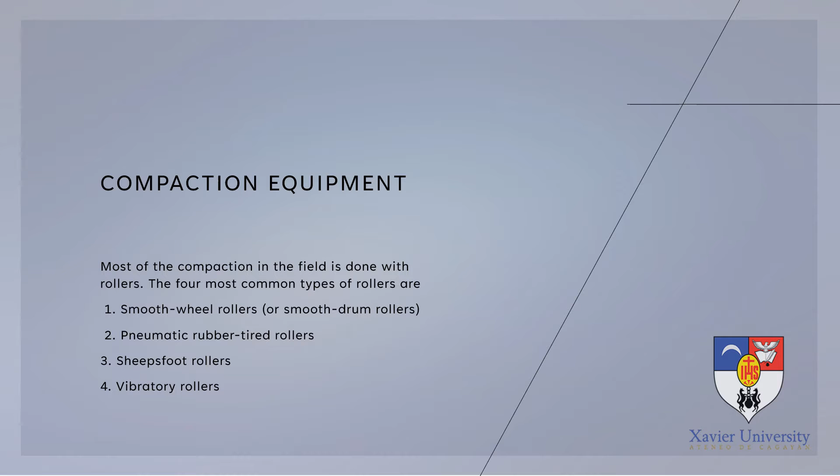The four common types of rollers are the smooth wheel rollers, the pneumatic rubber-tired rollers, the sheep's foot rollers, and vibratory rollers. We will be discussing each of these in the succeeding parts.

All right, so first we'll have smooth wheel rollers. This is how a smooth wheel roller looks like. We can commonly see this in construction sites, just like the construction site for a road widening project or road concreting project. Smooth wheel rollers are suitable for proof rolling subgrades and for finishing operation of fills with sandy and clayey soil. These rollers provide 100% coverage under the wheels.

With ground contact pressure as high as 310 to 380 kilonewton per square meter, they are not suitable for producing high unit weights of compaction when used on thicker layers.

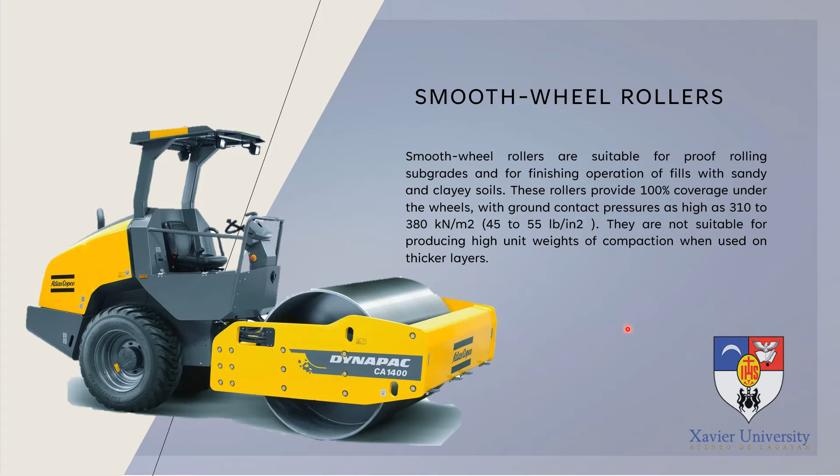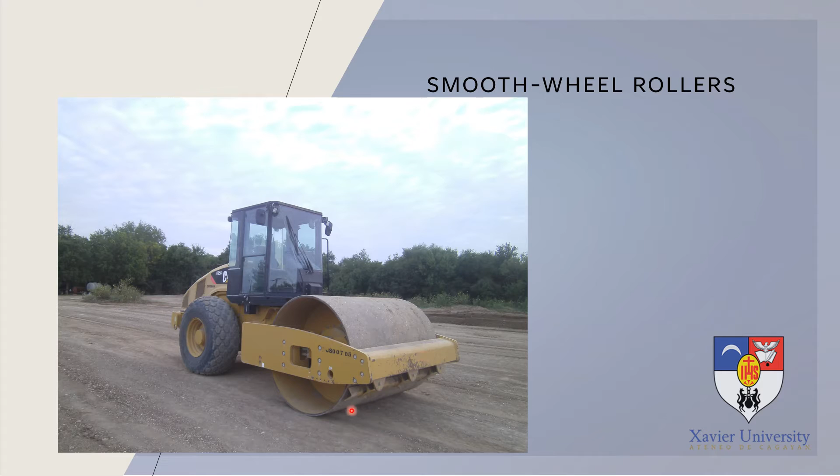That's why, for example, our embankment or subgrades are designed to be of a certain depth, for example not more than 200 millimeters. Since if you are going to use this type of roller for compaction, you would have to lay your soil in thinner layers. For example, in the DPWH specifications, you would have to lay your embankment or layer in 150 to 200 millimeters thick only, so that you would be able to compact your soil properly.

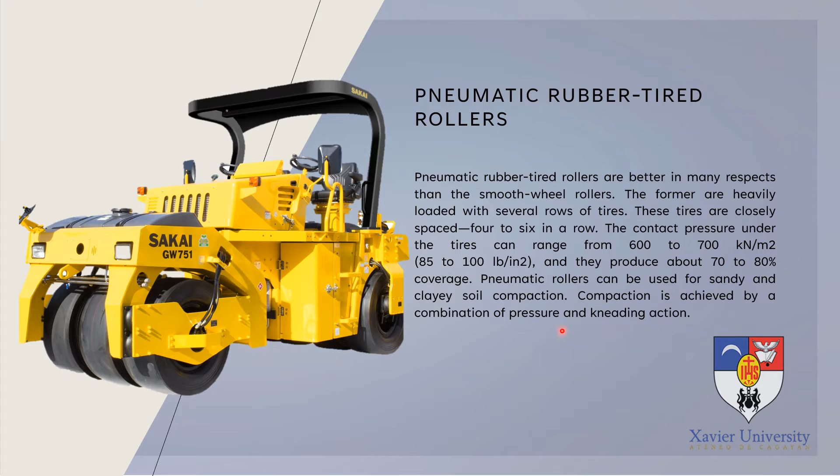But it's stronger, and the parts that are not covered are also passed over again. Compaction is achieved by a combination of pressure and kneading action. This is the mechanism of how this type of roller actually compacts our soil, through pressure and kneading action.

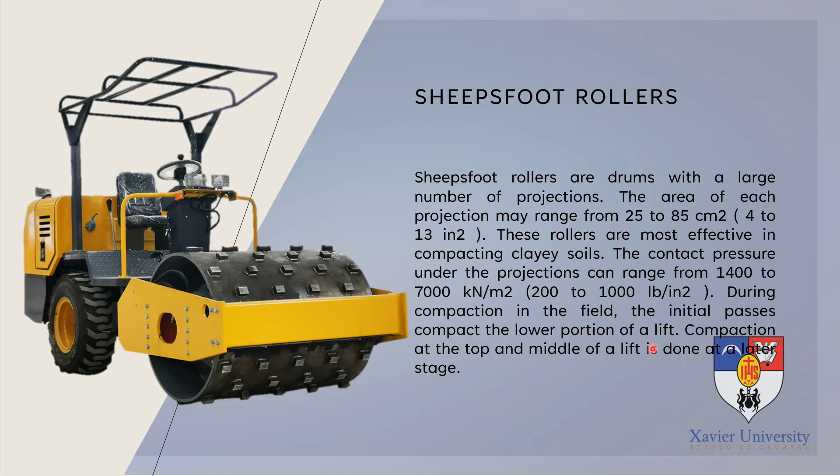The third one is the sheep's foot roller. Sheep's foot rollers are drums with a large number of projections. The area of each projection, referring to its small protrusions, may range from 25 to 85 centimeters squared. These rollers are most effective in compacting clayey soil.

The contact pressure under the projections can range from 1,400 to 7,000 kilonewton per square meter.

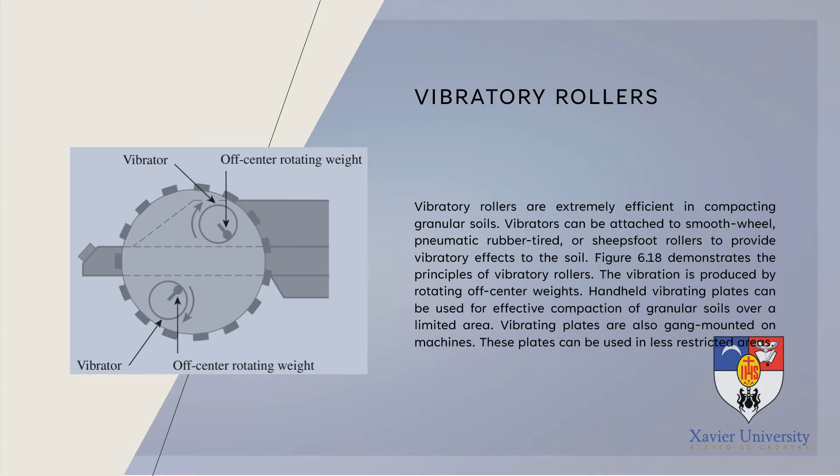We also have the vibratory rollers now. Vibratory rollers are extremely efficient in compacting.

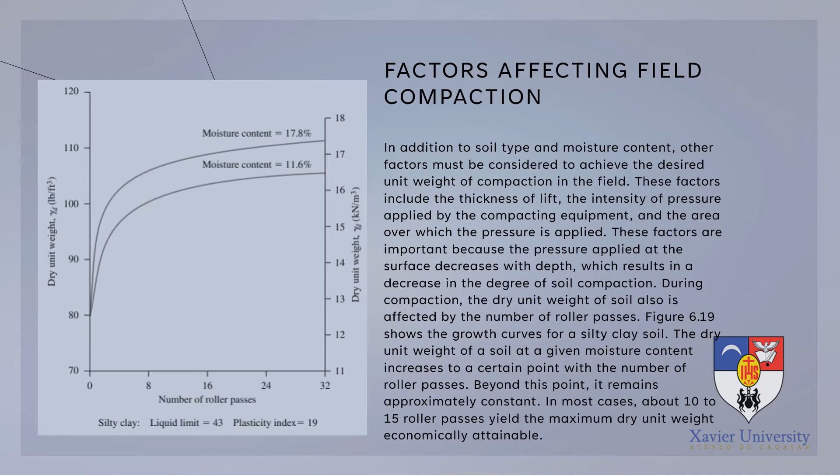So now, let us talk about the factors affecting our field compaction.

As previously discussed in soil compaction in the laboratory, such as the effect of soil type, we also have factors affecting our field compaction. In addition to soil type and moisture content, other factors must be considered to achieve the desired unit weight of compaction in the field.

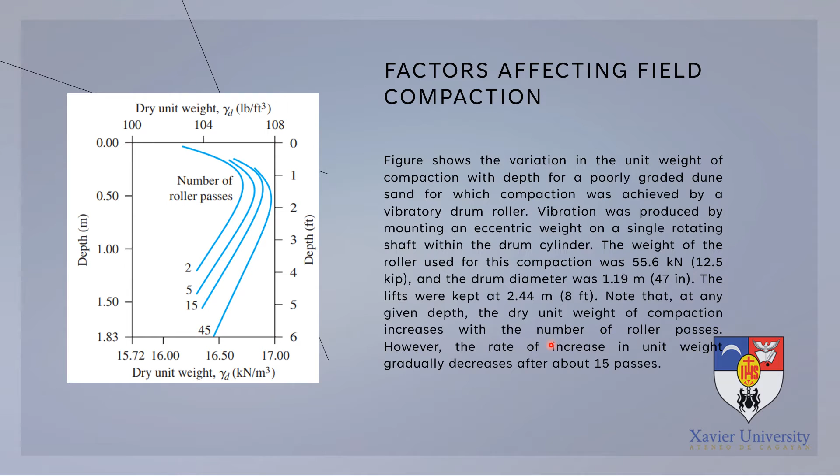These factors include the thickness of lift, the intensity of pressure applied by the compacting equipment, and the area over which pressure is applied. These factors are important because the pressure applied at the surface decreases with depth, which results in a decrease in the degree of soil compaction.

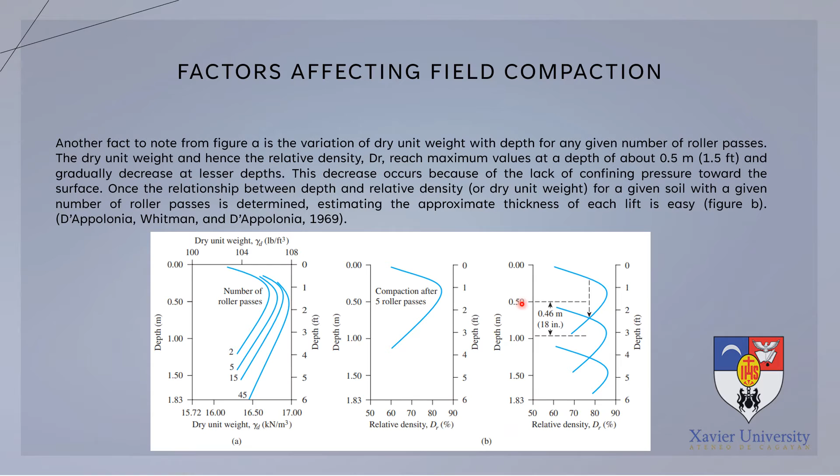So the dry unit weight increases to a certain point with the number of roller passes. Beyond this point, it remains approximately constant. In most cases, about 10 to 15 roller passes, it stops increasing and becomes more constant, yielding the maximum dry unit weight economically attainable.

What this graph means is that the more roller passes on the soil to be compacted, the more it increases its dry unit weight. That's why in soil compaction in the field, our goal is to increase the unit weight of our soil, wherein we provide a denser state for our soil.

The figure here also shows the variation in the unit weight of compaction with depth for a poorly graded dune sand, where each compaction was achieved by a vibratory drum roller. Vibration was produced by mounting an eccentric weight on a single rotating shaft within the drum cylinder. The weight of the roller used for this compaction was 55.6 kilonewtons, and the drum diameter was 1.19 meters. The lifts were kept at 2.44 meters.

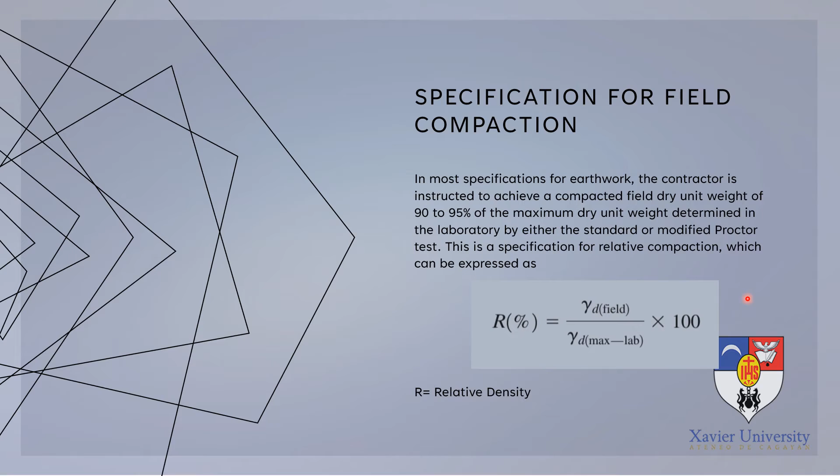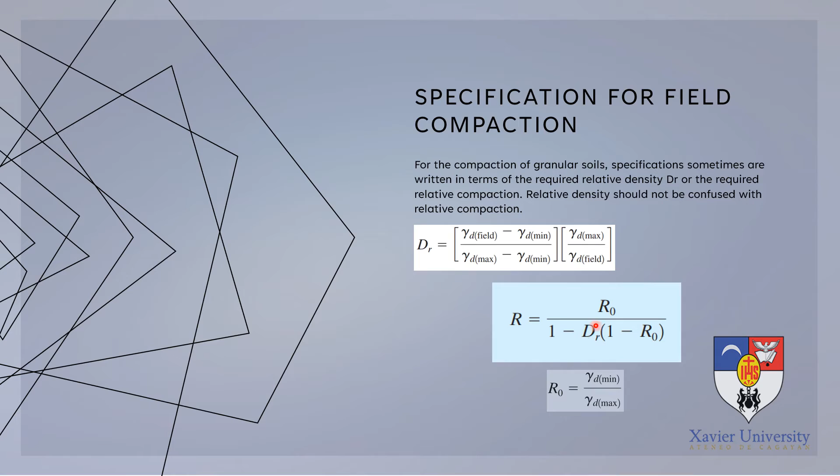Note that at any given depth, shown here in meters and feet, the dry unit weight of our soil increases with the number of roller passes. At just two roller passes, the dry unit weight is low. At five passes it increases, and our calibration of dry unit weight grows larger, continuing to increase from 15 passes onward. So as the number of roller passes increases, the dry unit weight also increases.

Another fact to note from Figure A is the variation of dry unit weight with depth for any given number of roller passes. The dry unit weight, and hence the relative density DR, reaches maximum values at a depth of about 0.5 meters and gradually decreases at lesser depths. This decrease occurs because of the lack of confining pressure towards the surface. Once the relationship between depth and relative density for a given soil with a given number of roller passes is determined, estimating the approximate thickness of each lift is easy.

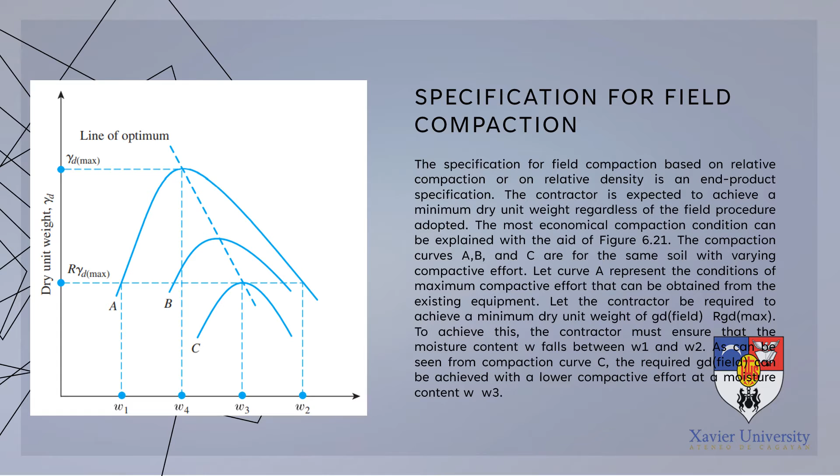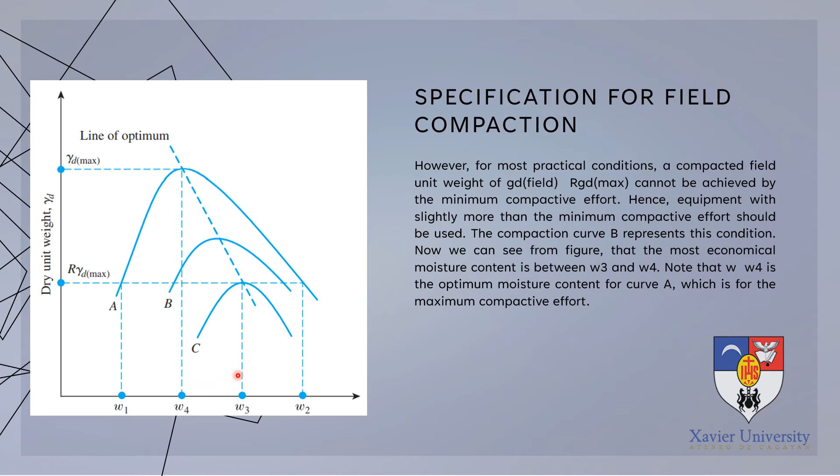Now let us talk about the specification for field compaction. In most specifications for earthwork, the contractor is instructed to achieve a compacted field dry unit weight of 90 to 95% of the maximum dry unit weight determined in the laboratory by either the standard or modified Proctor test. This is a specification for relative compaction, which can be expressed as relative density, or in the field, referred to as the degree of compaction. It is the ratio between the maximum dry unit weight actual over the maximum dry unit weight obtained in the laboratory, times 100%, that is the degree of compaction. For item 104, the embankment, or the aggregate sub-base course, we have different requirements for the degree of compaction.

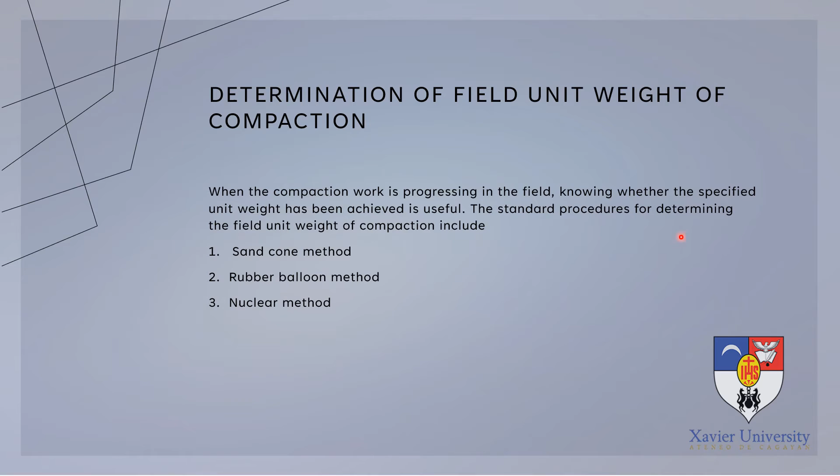For example, for item 104, the embankment, DPWH requires 95% of the maximum dry unit weight to be the dry unit weight on the field.

For example, from the compaction test we performed, either modified or standard Proctor test, we were able to get 2,000 kilograms per cubic meter as our maximum dry density or maximum dry unit weight. DPWH or most contractors require 95% of that 2,000 kilogram maximum dry unit weight to be the dry unit weight of the compacted soil on site.

So since we've already determined our maximum dry density in the lab, when we perform the determination of the dry unit weight on site, what we get is the gamma dry on field. We divide the two, times 100, and that gives us our degree of compaction, also referred to in most common geotechnical books as relative density. So it's really just two values: density from the lab and density on site. This is where you get the dry density on site once you've finished compacting the field, or once the required number of roller passes has been attained, enough to test if it has reached the densest state or attained the maximum dry unit weight. So we will be discussing further the methods we can use to determine the dry unit weight on site.

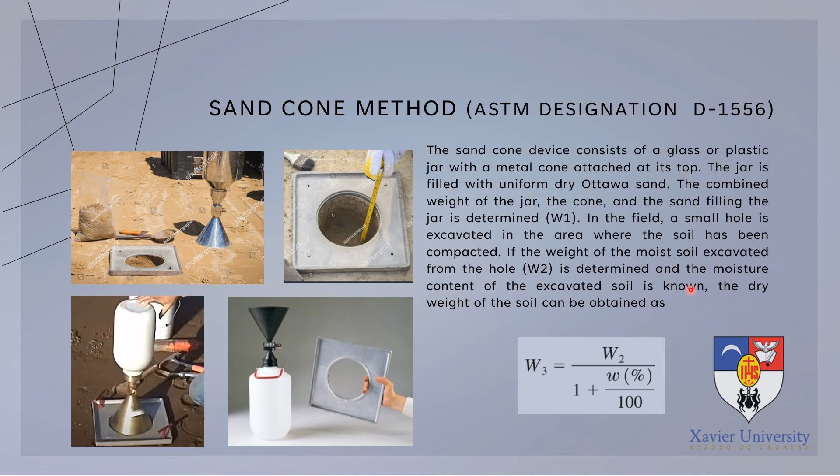For the compaction of granular soils, specifications are sometimes written in terms of the required relative density DR or the required relative compaction. Relative density should not be confused with relative compaction.

Relative compaction has its own formula. It can be used in various ways, but this is usually the formula used for relative compaction. When you are asked for the relative compaction for field compaction on site, this is the formula we use, where DR here is the relative density, and RO is the ratio of the gamma dry minimum and the gamma dry maximum.

So the contractor must be able to achieve the gamma dry maximum or gamma dry minimum based on the formula for relative compaction, which involves gamma dry minimum or gamma dry maximum. To achieve this, the contractor must ensure that the moisture content falls between W1 and W2.

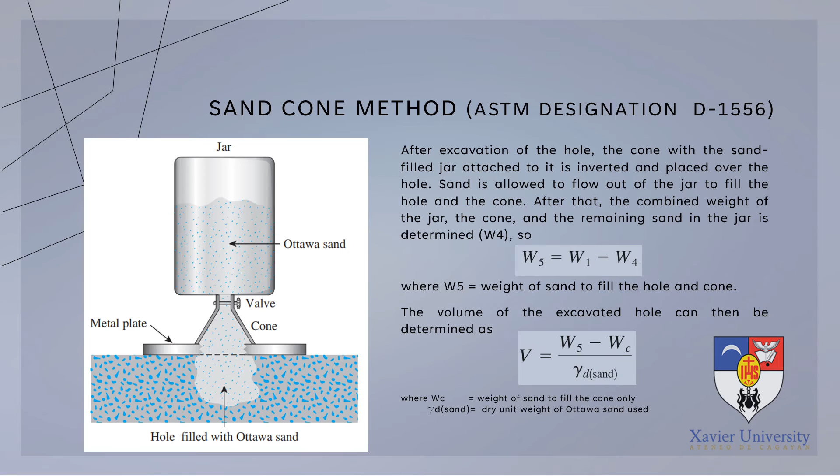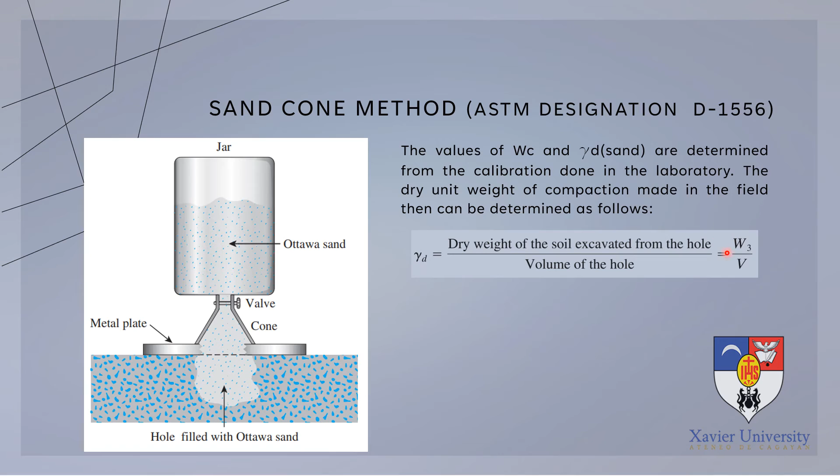So these are aligned along the compactive effort, where it's the same soil. A is the maximum compactive effort, meaning the equipment has a larger capacity or more number of roller passes. Since more roller passes means higher construction cost because you use more fuel, the construction cost increases significantly, that's why the compactive effort is considered high.

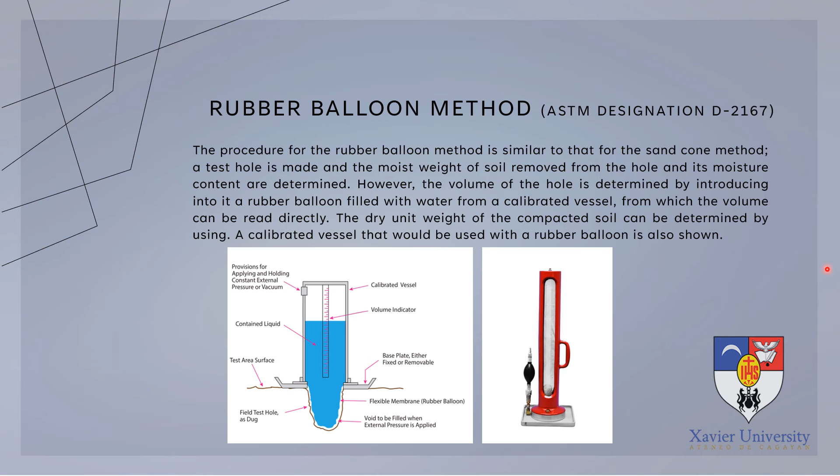Now let us talk about the determination of field unit weight of compaction. This is the goal when we do compaction, and how do we test if the compaction of our soil is already enough, so that it won't settle under the application of load. So we need to identify the actual unit weight of our compacted soil.

We have to compare that to the maximum dry density of the same soil that we have obtained from the lab. We will be talking about three methods, but only one of these is actually adopted on site.

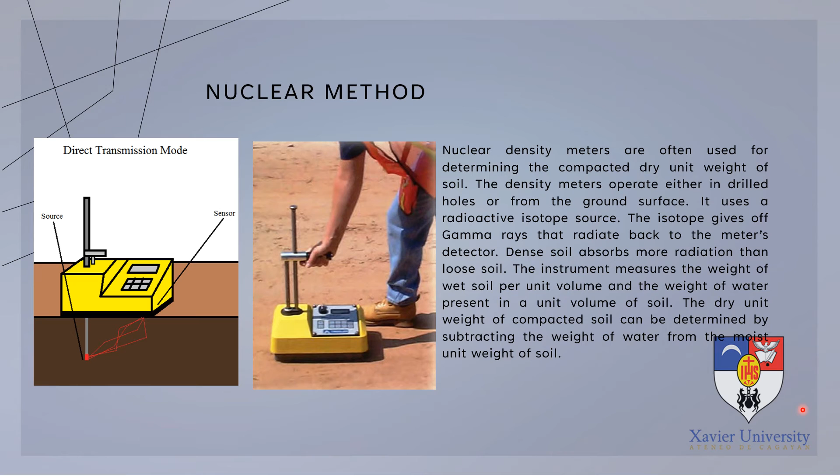When the compaction work is progressing in the field, knowing whether the specified unit weight has been achieved is useful. The standard procedures for determining the field unit weight of compaction include the sand cone method, the rubber balloon method, and the nuclear method. We will be discussing them one by one.

First, we have the sand cone method, which has an ASTM designation of D1556. This is the provision of ASTM on how to perform the sand cone method.

Step by step: the sand cone device consists of a glass or plastic jar with a metal cone attached to its top. The jar is filled with uniform dry Ottawa sand. The combined weight of the jar, the cone, and the sand filling the jar is determined as W1.

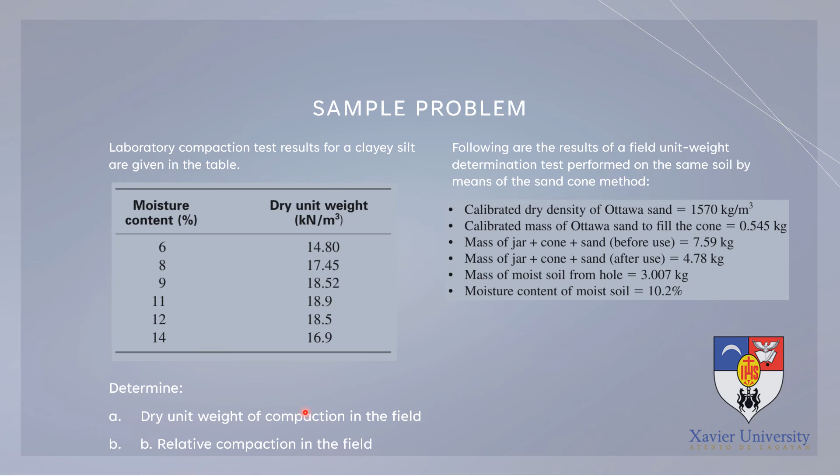So a small hole is excavated in the area where the soil has been compacted. If the weight of the moist soil excavated from the hole, W2, is determined, and the moisture content of the excavated soil is known - from that hole, we get a soil sample, we weigh it to get the weight of wet soil, then we oven-dry it, and after oven we weigh it again to get the weight of dry soil. Subtracting these two, we can obtain our moisture content or actual moisture content.

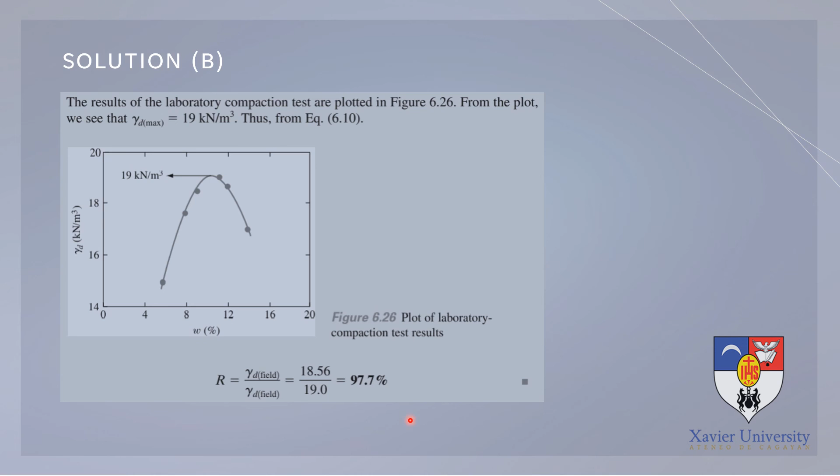So the weight 5 is equal to the weight of sand to fill the hole and the cone. So the volume of the excavated hole can be determined as the volume of the hole is equal to the weight 5, which is equal to W1 minus this W1 - actually the sand, the weight of the sand before pouring, minus W4 which is equal to the weight of the sand after pouring. So from this, since we know the unit weight of the sand, we can also get the volume of our hole.

Alright, so at this time we have already obtained the volume of our hole or the volume of the soil. So earlier we were able to get the weight of our soil, and then we were also able to get the volume of our hole, which is actually the volume of our soil.

From that, what we use is the dry weight of the soil excavated, wherein the moisture content has already been subtracted from our actual soil. Once the actual moisture content is removed, we can get the dry weight of our soil. So this is what we divide with the volume that we have obtained, and then we will be able to come up with the value of our gamma dry. So our gamma dry is just the weight of solids. And then, the conventional or more common formula for our gamma dry is the weight of solids over the volume of solid or the total volume.

So that is how we conduct the sand cone method so that we are able to compute or determine the actual unit weight of our soil compacted on field. So another method which is not really common on site is the rubber balloon method, or the ASTM designation D2167. The procedure of the rubber balloon method is similar to that for the sand cone method - they are similar, you still dig a hole.